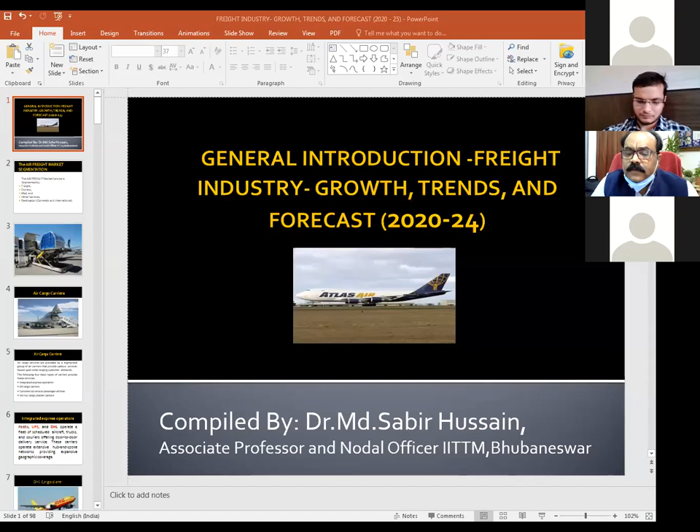Now I'll be sharing my screen with you people. I'll be showing you a PPT. As the PPT says, General Introduction to Freight Industry, Growth, Trend and Forecast 2020-24.

Before starting, let me tell you, in the present scenario of pandemic, this is one industry which is working as a savior to civil aviation across the globe. Because of the present pandemic, the entire world has stopped. All business operations have virtually come to a halt, except virtual operations. But during this pandemic, one business operation which is doing very good business is the freight industry, and especially the air freight industry, because of its faster mode of operation and providing emergency service across the globe.

Even many airlines of the world who were known as passenger airlines, to survive in the present scenario, have converted some of their fleets into cargo fleets to sustain the economic strain of the present pandemic. Thus, it is opening a Pandora's box in terms of career opportunities for aspiring graduates and postgraduates who want to look for a career opportunity in the field of travel, tourism, cargo, logistics, and supply chain.

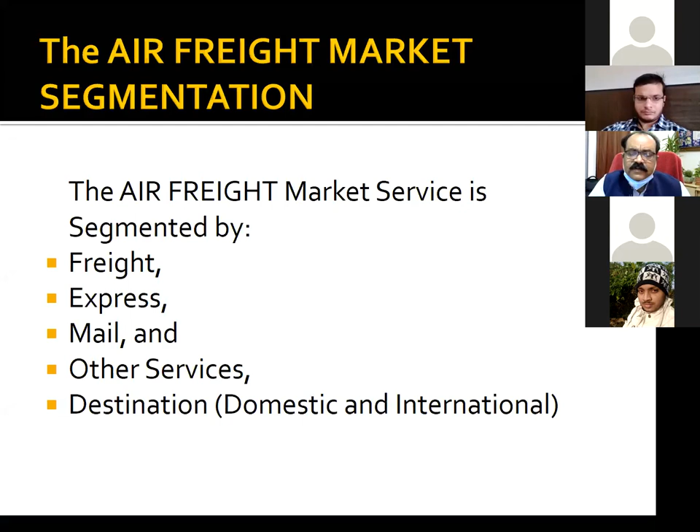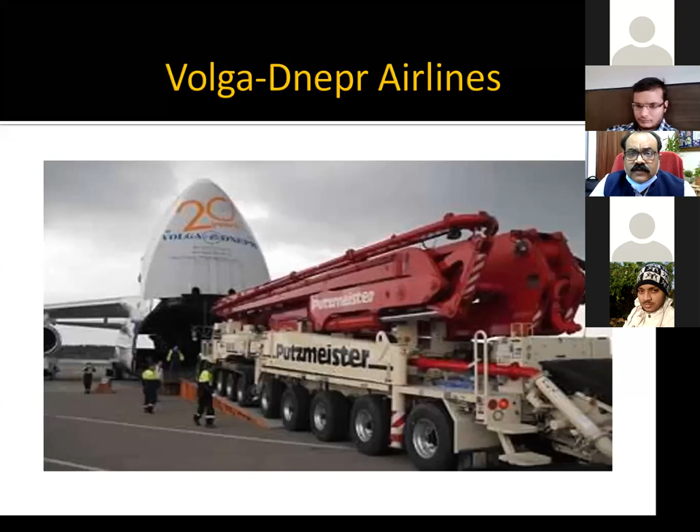Imagine a machine getting into the aircraft. So you can imagine how big the air cargo carriers are. One cargo carrier can carry 8 Abrams tanks in one go. Such is the capacity of air cargo carriers.

The 4 types of air cargo carriers discussed in the previous section provide the following 3 primary types of air cargo service options: integrated express services, freight forwarding services, and airport to airport services.

Integrated express carriers move the customer's material door to door, providing shipment, pickup, transport via air and truck and delivery. Like DHL. DHL is an integrated express carrier.

If you want to send a consignment through DHL, give a call to their local office. Their truck would come along with their personnel. They will pick the consignment from your place, do the documentation, and you need to pay only. They would send the consignment by air to the destination, and at the destination also, they would deliver it at the doorstep. For all these things, they would be charging. They are called integrated because they also take care of the road transport portion, the cartage portion, the documentation portion, and the clearing portion. Everything is taken care of by them.

They provide desk to desk services. Integrated express operators include FedEx, UPS, DHL, Airborne Express, and to a certain extent, USPS is also an integrated postal service carrier. Express companies provide next day document and small package service to customers.

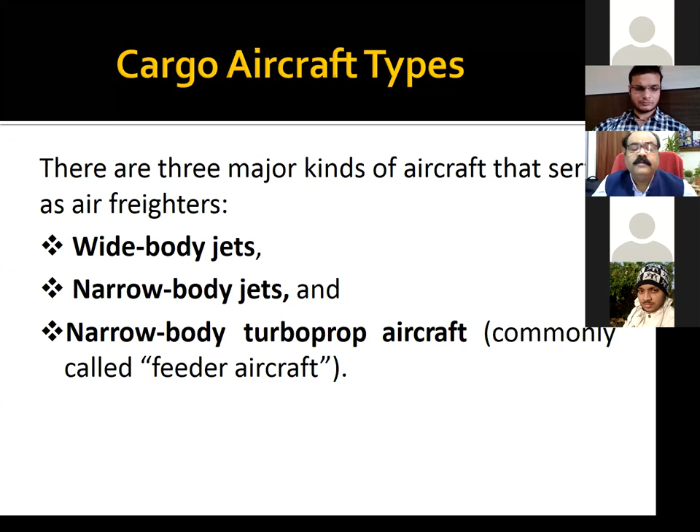4, 6, 10 seats. One row is containing 10 seats, whereas in a narrow bodied jet, one row is containing only 6 seats, with only one passageway in the center. But in a wide body jet, you will have 2 passageways in the center. I'll show you some photographs which will clarify this for you in the next slide maybe.

There are different types of aircraft: military aircraft, civilian aircraft, private aircraft, commercial aircraft, passenger aircraft, cargo aircraft, and combination aircraft. These are different types of aircraft in which commercial operations happen.

Okay, I'll give you 5 minutes at the end to clarify your doubts.

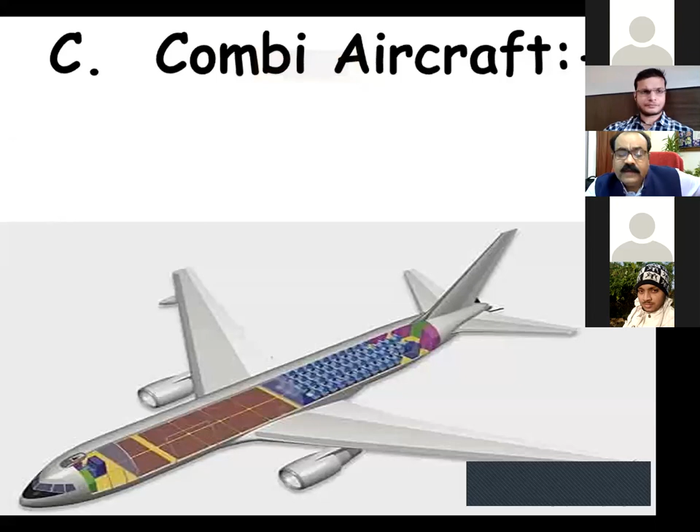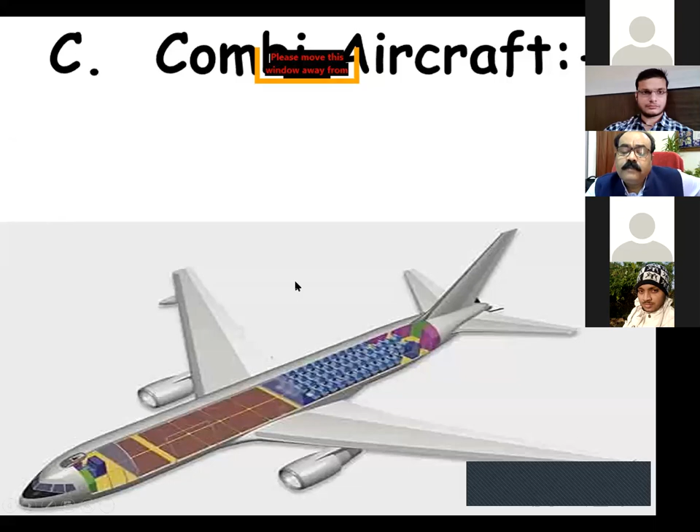Let me see, aircrafts are mostly classified on the basis of engines, the number of engines. Aircraft are single engine, twin engine, or multi-engine. One example is a single engine aircraft, where the engine is mounted at the front, propeller driven.

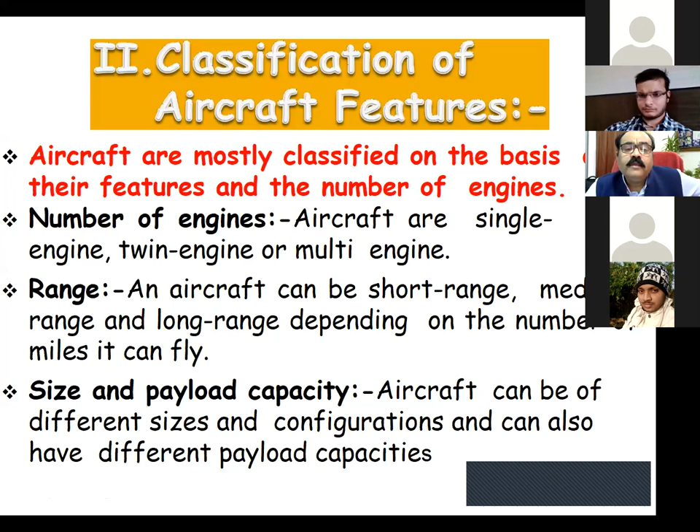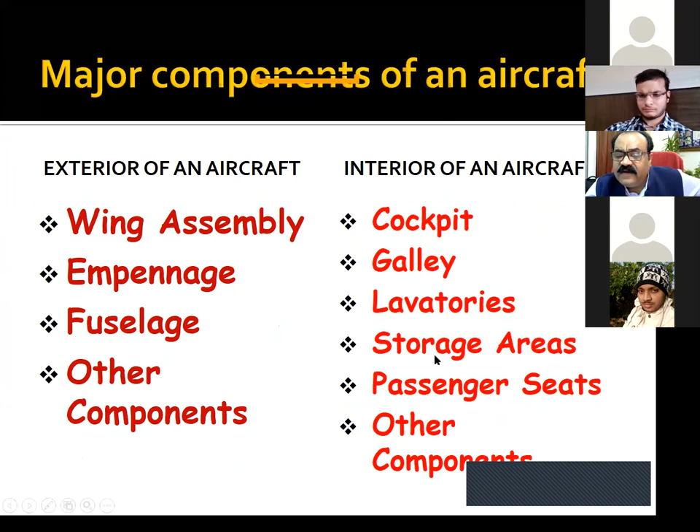Like for example, major components of an aircraft, the exterior of an aircraft, what constitutes it? Wing assembly, empennage or the tail portion is called empennage of the aircraft. Fuselage, the main body, is called fuselage of the aircraft, and other components. Then interior - you will have cockpit, galley, lavatories, storage areas, passenger seats, and other components of the aircraft. This is how the aircraft's different body parts are located.

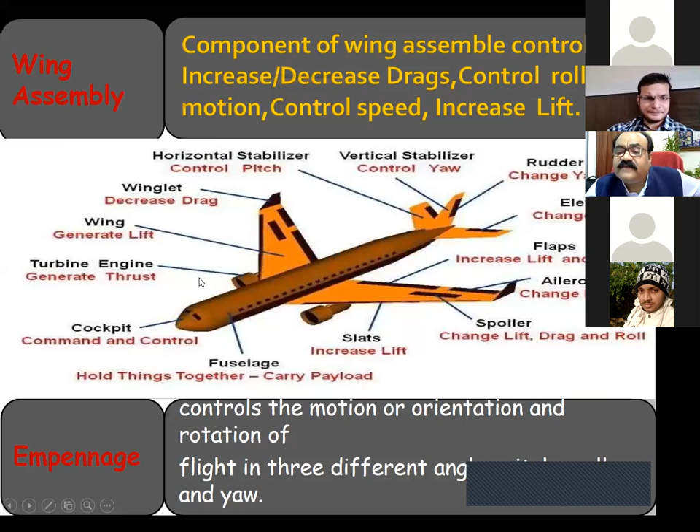And these small portions are called winglets. This is horizontal stabilizer. This is rudder - with the help of this, the aircraft's direction is controlled. These are spoilers, they open up at the time of takeoff and landing. These are engines. This main body is called fuselage. This portion where the pilot sits is called cockpit. These are turbine engines, and in some cases there are jet engines. Okay, let us go further.

Three types of fuel tanks are available: integral fuel tanks, rigid removable tanks, and bladder tanks. We are discussing only integral fuel tanks.

Where is the fuel tank of an aircraft located? The fuel tank of the aircraft is located in the wings. Wherever the engine is located, the fuel tank is also located there, somewhere in this portion, the connector between the fuselage and the wing.

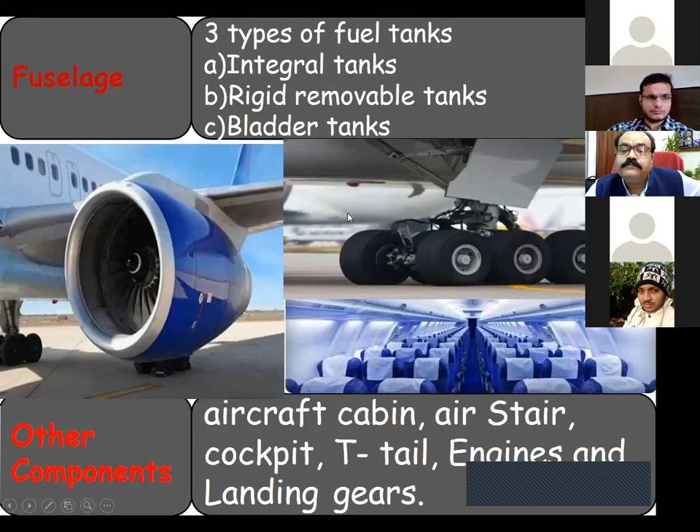This is the cockpit of an aircraft, and this area where necessary facilities from where the hostesses and flight pursers operate are called the galley. Necessary food trolleys, convection machines, heating machines, necessary equipment and stationery, all those things required for serving on the aircraft are kept here. This is called the galley area of the aircraft, from where the hostess and operators work.

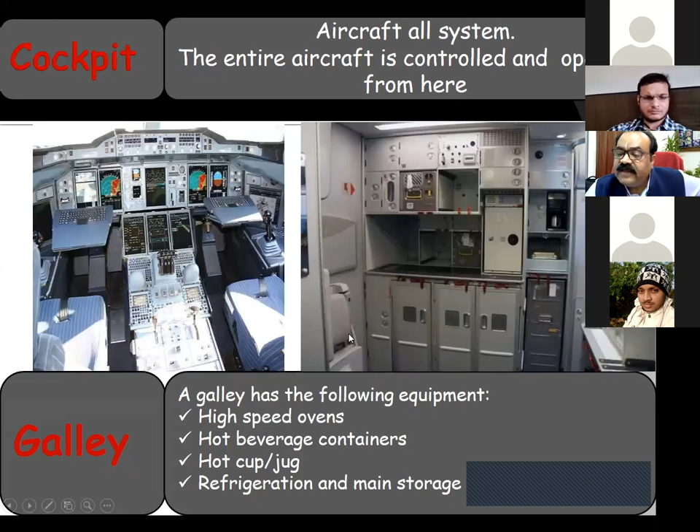And this is the loo of an aircraft. This is how the aircraft loo, the lavatory, looks.

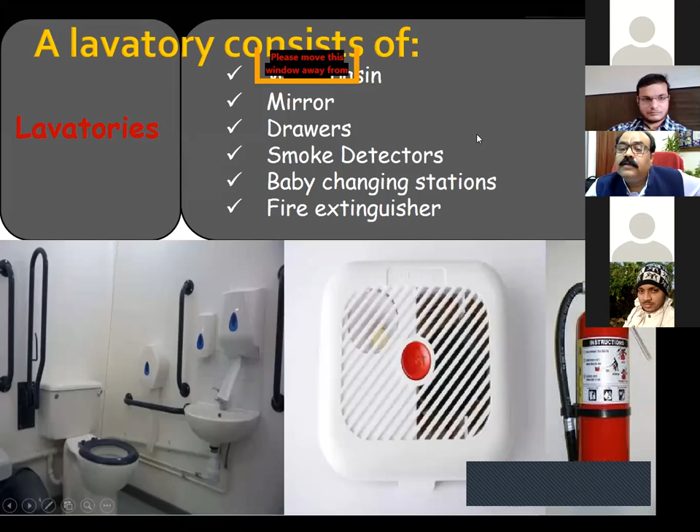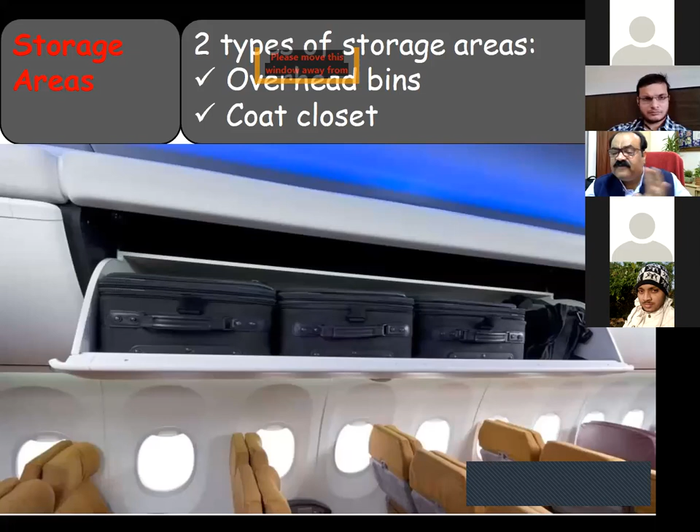Then these are the chambers where your cabin baggage needs to be kept, just above the seats. There are specific dimensions; you can only carry baggage that can be kept in the upper cabin inside the aircraft. These storage areas are called overhead bins, and coat closets. Don't carry heavy cargo inside the cabin, it is not allowed. There are specific maximum dimensions and weight you can carry.

These other components are passenger controls, the passenger control unit or PCU. From here you can switch on the light, just press one button to switch on the reading light. Then you can control the AC vents by turning it, to control the flow of air. From this unit, in case of depressurization or low oxygen filling, this particular portion would open up and the oxygen mask would fall automatically. You have to pull it and put it in your mouth to assist yourself with oxygen.

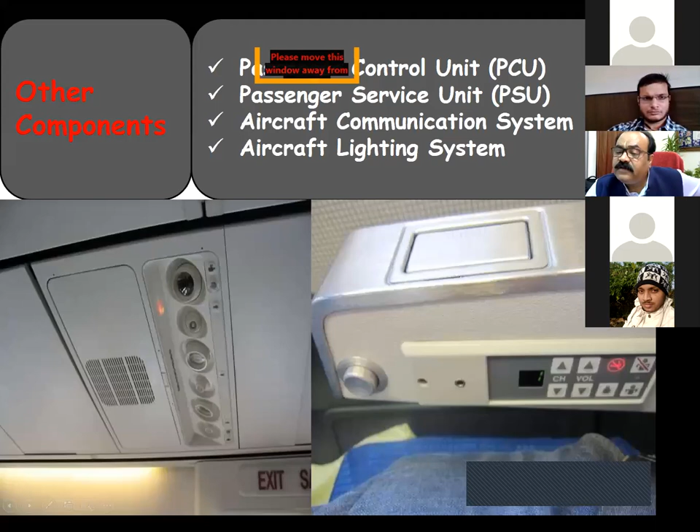And these are also passenger service units, with the aircraft communication system and aircraft lighting systems. Here you can control light, your music, etc. You can put your earphone sockets here and control your music. You can demand music in some airlines, it is available, but not in every airline.

There are major aircraft manufacturers who manufacture aircraft for commercial airlines. There are two major aircraft manufacturers in the world. One is the American company called Boeing. Another is a European conglomerate, meaning a combination of about 4 or 5 companies like France, Germany, Spain and UK, which together have constituted one company called Airbus. These are the two major companies who provide different commercial airliners to the world: Airbus of Europe and Boeing of United States. Besides that, there is another company, Antonov, which provides aircraft to the Russian side of the world.

Antonov is from Ukraine. Then there is a company from France and Italy, ATR, which makes smaller aircraft operating in smaller sectors; they are turboprop aircraft. Then you have Bombardier from Canada, Comac from China, Embraer from Brazil, Let Kunovice from Czech Republic, Mitsubishi from Japan, United Aircraft Corporation from Russia which includes Tupolev, Yakovlev, Sukhoi and Ilyushin - these are all Russian aircraft. Then you have AVIC, the Aviation Industry Corporation of China.

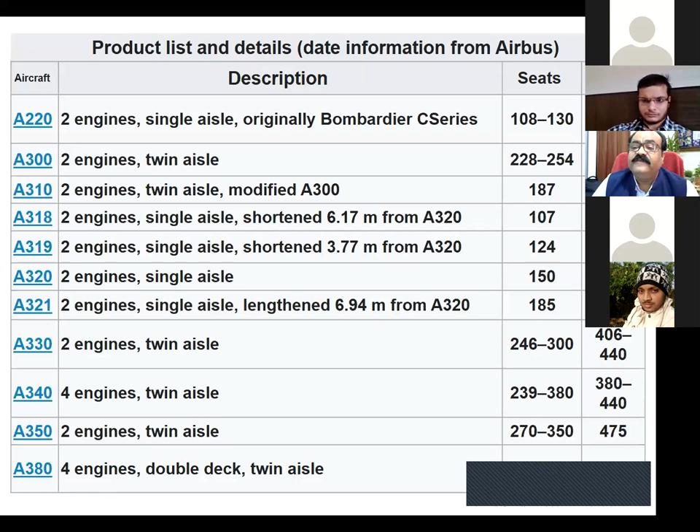I'll show you details of every company and their types of aircraft. This is from Airbus, different types of aircraft provided by Airbus. See, the A220 is a 2-engine, single-aisle aircraft, originally the Bombardier C Series, accommodating up to 130 passengers, maximum 160. The A300 is a 2-engine, 2-aisle aircraft carrying 228 to 254 passengers, maximum 361. Then there's the A310, A318, A319, A320, A321 - the A319, A320 and A321 are the most popular aircraft by Airbus.

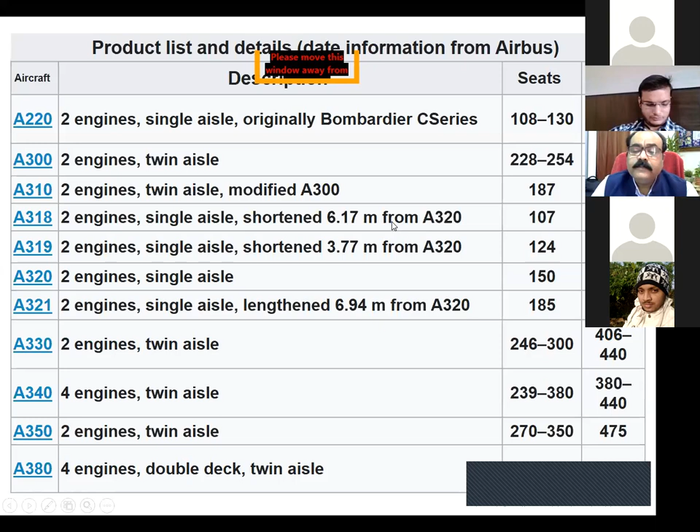The A330 is a twin-engine, twin-aisle, bigger wide-bodied aircraft. The A340 is a 4-engine, twin-aisle aircraft. The A350 is a 2-engine, twin-aisle aircraft, and the A380 is a 4-engine, double-deck, twin-aisle aircraft. These are the different types of aircraft provided by Airbus. Let us go to the other manufacturer, Boeing.

Boeing has different types of aircraft. The 737 can carry about 215 people maximum, minimum 85 people in this aircraft.

Boeing 747 is one of the biggest aircraft of all time, most popular aircraft. It is popularly called the Airbus, but actually it is not Airbus. Airbus is a different company. It can accommodate up to 605 people maximum, but normally, ideally, it carries about 450 to 460 passengers.

Boeing 767 can carry a maximum of 375 people. Boeing 777 carries about 550 people. Then Boeing 787.

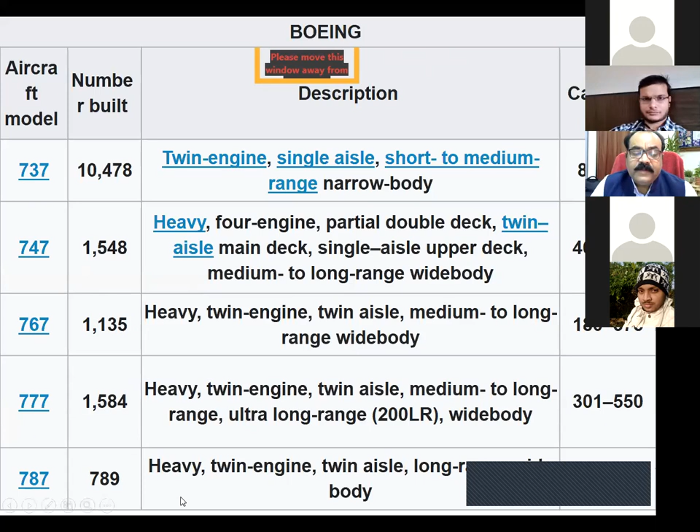Then you will have Boeing 707, 717, 200, 720, 727, 737 original, 737 classic, 737 NG, 737 MAX, 747-8, 757. These are different series of aircraft of Boeing.

Then you have Antonov. In Antonov, you have Antonov 40, Antonov 2, Antonov 2-100, Antonov 3, Antonov 4, Antonov 6, Antonov 8, Antonov 10, Antonov 11, 12, 13, 14, and Antonov 20.

These are all turboprop aircraft. Remember, all the Antonov aircraft are turboprop aircraft, meaning they do not have jet engines. They have fan type engines, turboprop engines.

But these are all Ukrainian aircraft, popular low-cost aircraft, still operating in the Russian part of Europe. Bulgaria, Czechoslovakia, in these areas these aircraft are very popular. Armenia, Uzbekistan, Tajikistan, these areas, CIS countries.

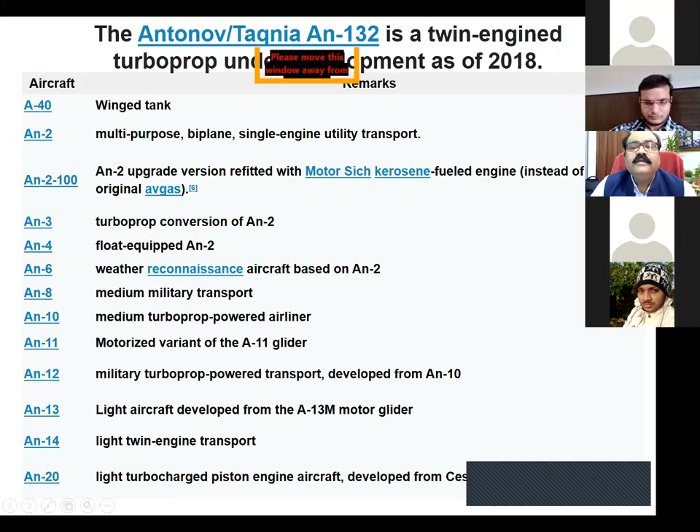Then you have Antonov 22, Antonov 24, Antonov 26, and some of the Antonov aircraft are also military transport aircraft, bigger aircraft, used for the purpose of military transportation.

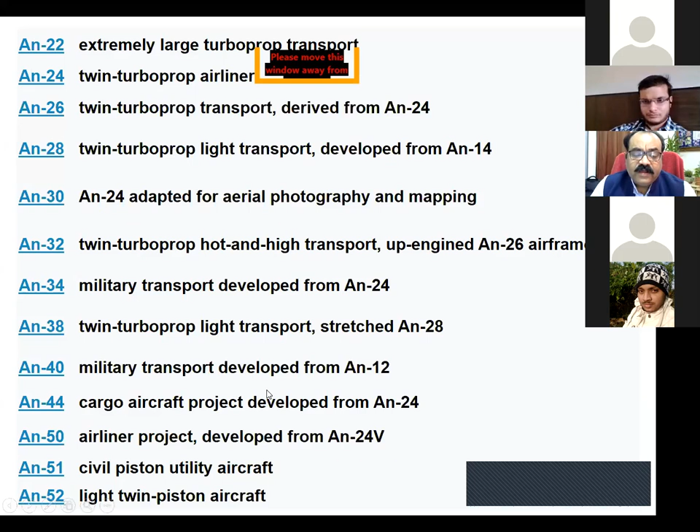Like Antonov 44 is a cargo aircraft, Antonov 50, Antonov 51, Antonov 52, Antonov 70, Antonov 71. These are different Antonov aircraft. Mainly, these aircraft are famous for their cargo lifting capacity.

Then Antonov 225, a strategic airlifter, the largest aircraft ever built. Only one has been put into service. I'll show you the photograph of the biggest aircraft ever built, that is Antonov 225.

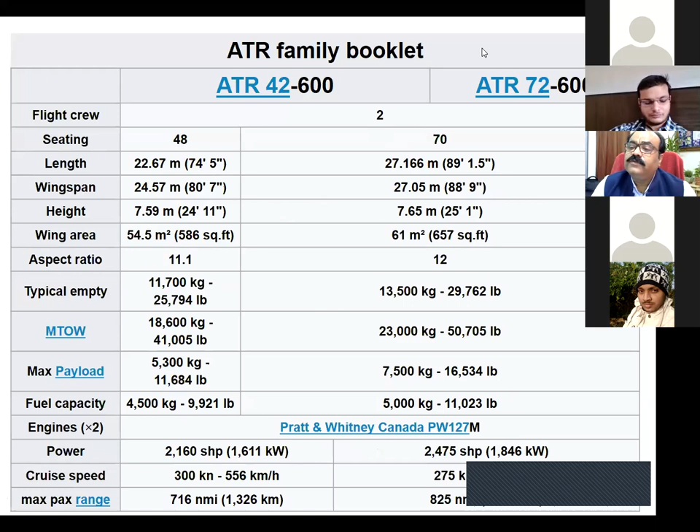Now you have ATRs, the French and Italy company. They have different aircraft and their capacities are mentioned here. ATR 72 and ATR 42, turboprop aircraft.

See, this is the photograph I was talking about. This is the photograph of Mriya, or Antonov 225. It's the biggest of them all. It holds the world record for largest single item payload of

418,834 pounds. It is carrying over its back another space shuttle, transporting one space shuttle. It is the largest aircraft ever built, having 6 engines.

See, 1, 2, 3. The other side also has 3 engines. Biggest aircraft, only one has been built, still in operation.

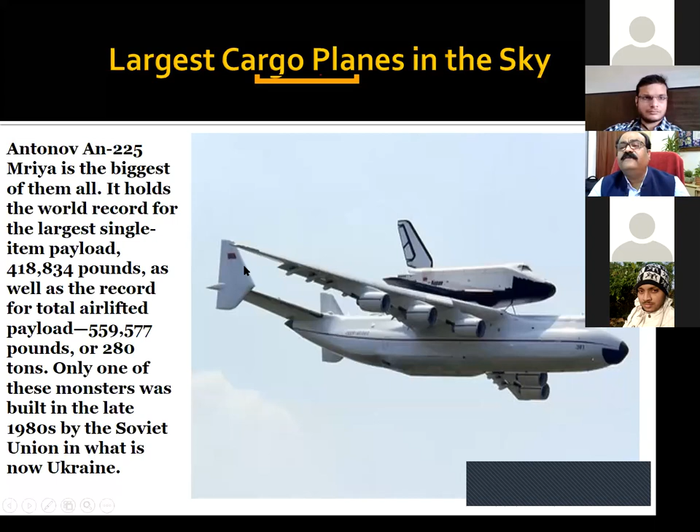Then you have this one from US, from Boeing. This is also one of the biggest aircraft of its kind, but second to Mriya. The 747-8, it's a freighter aircraft, a cargo version of the passenger 747-8.

The Intercontinental is actually a heavier plane with an almost 9 lakh pound maximum takeoff weight. But the Dreamlifter's fuselage design allows the plane to carry particularly large or awkwardly shaped items.

It is normally used by NASA people to carry rocket engines in the US. It is one of the most reliable aircraft of the United States of America for carrying odd-sized cargo. The body is designed that way.

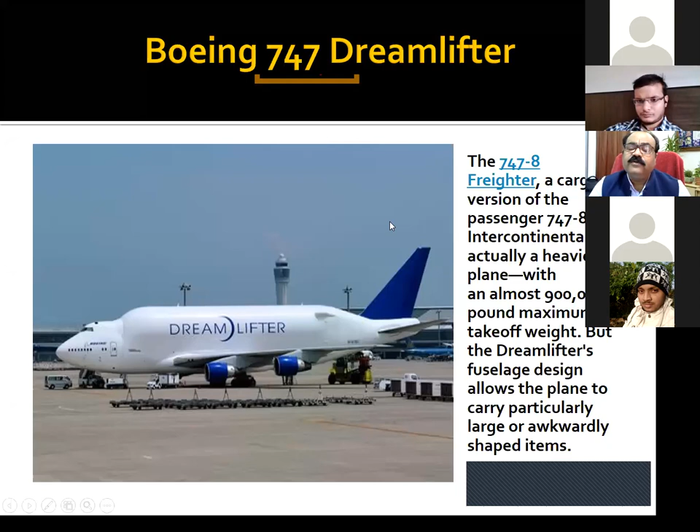Then you have Antonov AN-124. This is also one of the biggest aircraft, but the third biggest one. See, a submarine is loaded into this aircraft. The Soviet-built Antonov 124 Condor is the largest military aircraft in the world.

This deep submergence rescue vehicle is a kind of submarine. It is getting loaded into this aircraft. How big it could have been. And it is not only loaded, it is loaded with the help of a trailer truck. The whole truck would be getting into the aircraft, because only then can it be unloaded.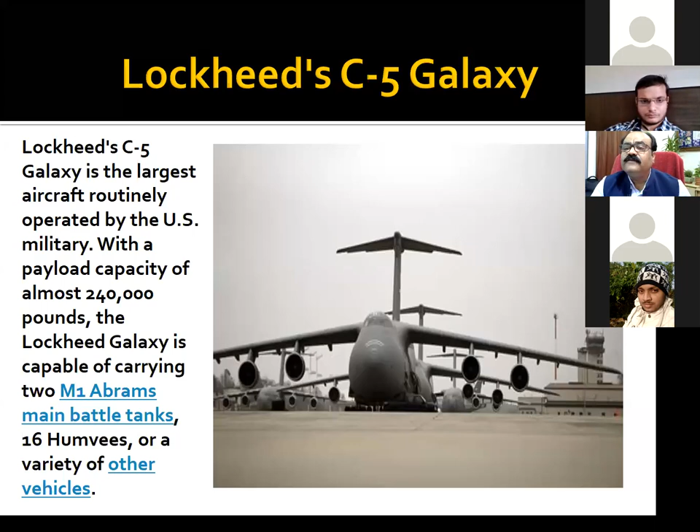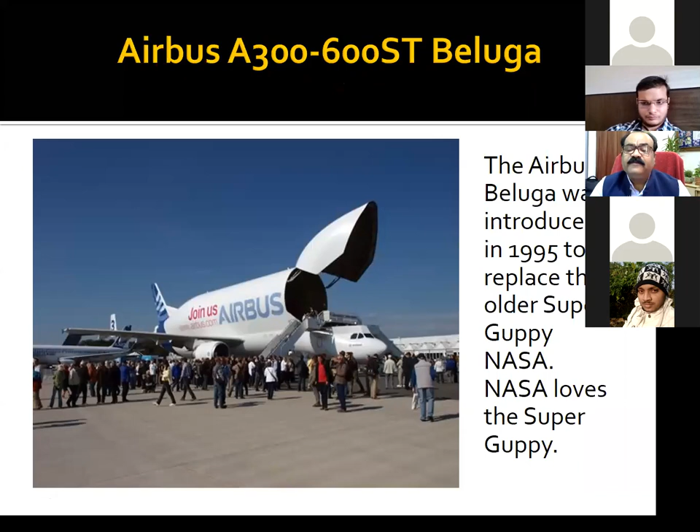And this is the Airbus Beluga, introduced in 1995 to replace the old Super Guppy of NASA. I've shown you already, but Super Guppy is still more popular than this Airbus Beluga. This is a bigger aircraft.

I think my time is up. Somebody else must be waiting for the class. Whatever portion is left, we'll discuss some other time.

Boys and girls, I'm very happy to address you people. Hope you people have got some kind of know-how about airline operations across the globe.

Now, is this audible? Am I audible, sir? Let me check if you want to ask me, Himanshu or Prince. Yes, sir. Prince and Himanshu, is anyone there? Yes, sir, I am here. Sir, we are here. Hello. Himanshu, am I audible? Yes, ma'am. Audible enough? Yes, ma'am. Anybody want to ask me any question?

So there are a few questions, but maybe we have lost the questions in the chat. Meera madam? No sir, Ranu Chauhan. Ranu, yes sorry, tell me what happened. Ranu, I'm not able to listen to you. I'm audible, Ranu. Sir, you are audible.

Yeah, there are a few questions. Can you ask me one? Am I audible, Himanshu? Yes, ma'am, you are. Sir, I'm trying to fix the problem. Am I audible? Ma'am, your voice is breaking. Sir, there is a question in the chat box. Okay, what is that question?

The question: Sir, I have worked with Indigo for 18 months as a security officer, so will it help me after doing MBA? Please guide. Of course, it will help you. Certainly, you would get weightage over other participants who have not worked.